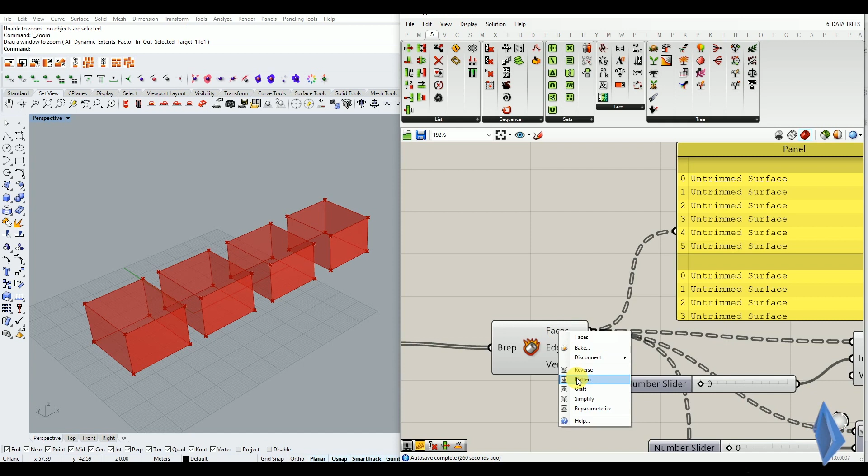Now let's try and flatten this and see what happens. If I right click on faces and click on flatten, take a look at how the data structure has changed. Now I only have one list, it says 0, no extra zeros, only one list, and all of my surfaces are inside one list. So I have 0 to 23. I have 4 boxes, 6 surfaces inside each box. 6 multiplied by 4 is 24. That's why you have 0 to 23.

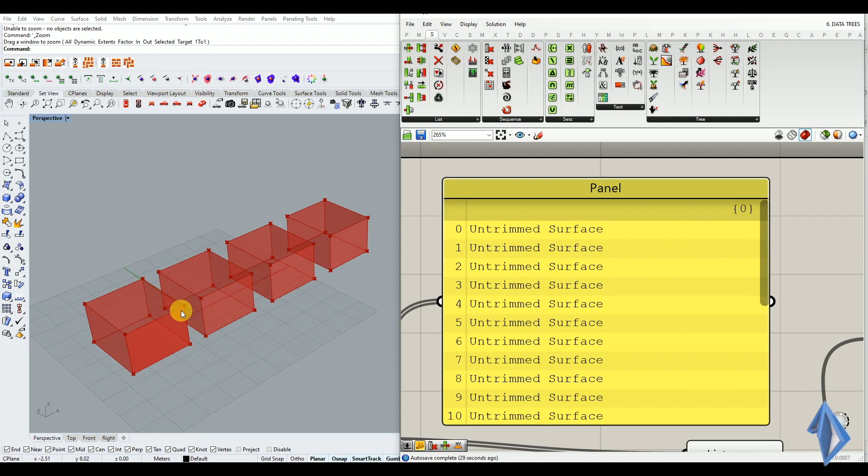So initially you have 24 surfaces, 6 surfaces inside each box, and you have 4 boxes. That's how the data has been structured. But as you can see, there are no multiple lists. There's only one single list, and all of the surfaces are inside that one list. And as you can also see, the wire turns straight. Now let's remove the flatten option. Just right click and click on flatten again, and it will go away. And now see that the data is again grafted naturally.

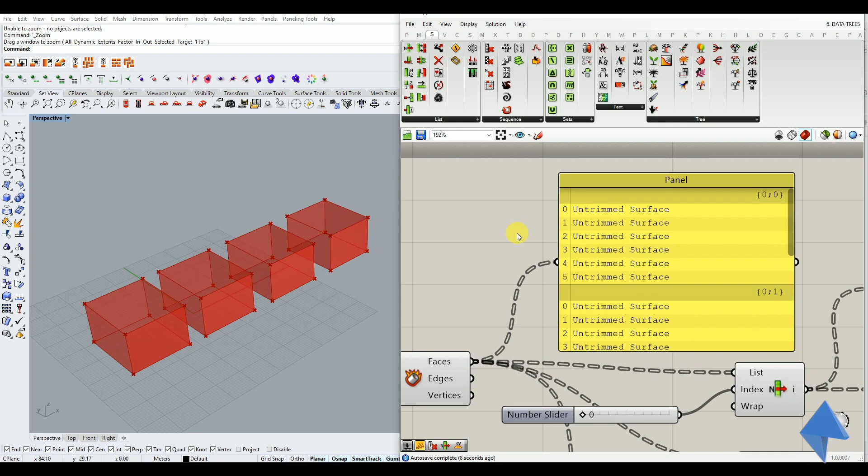So because the data structure is like this, when data is grafted and you are using list item, you are giving it the index 0. You are giving it this particular list, the same list that you can see over here. I'm inputting that list inside list. When 0 is going inside index, that means I'm selecting the 0th index of every list that I have in this particular panel, which means I'm selecting 0 over here, 0 over here, 0 over here, and also 0 over here. So that's why I'm selecting 4 surfaces at a time.

So if I click on this particular component, you see it's selecting 4 surfaces at a time. If I change it to 1, it's still selecting 4 surfaces at a time, which means it's selecting 1 from here, 1 from here, 1 from here and 1 from here. So that's how grafting works.

Grafting lets you select multiple data structures, multiple data objects in one single go, which makes Grasshopper a unique plugin, a unique visual scripting software, which allows you to work faster using the speed of computation. So this exactly is what computational algorithmic thinking, algorithmic architecture, algorithmic modeling is all about. You can use multiple data structures to select one single object or entity, and you can select multiple items inside that entity and manipulate it accordingly.

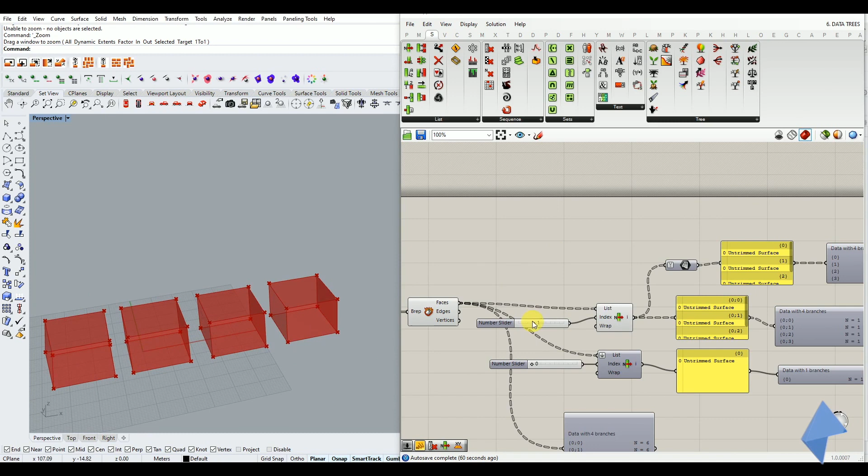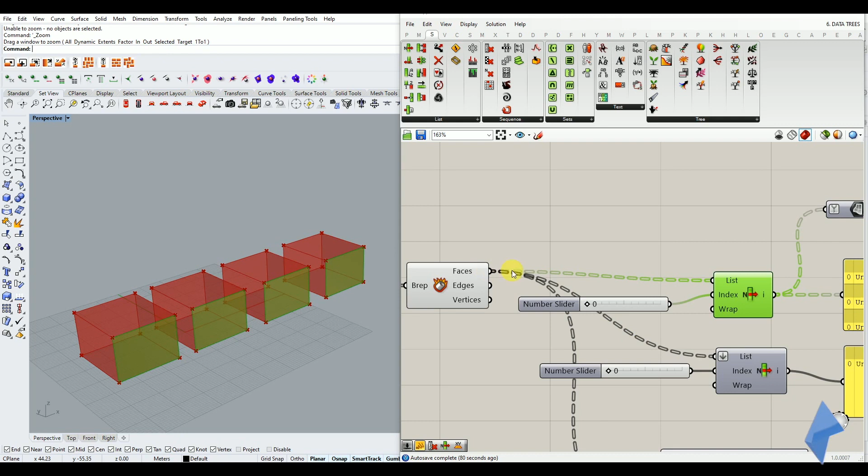So now I'll just go ahead and delete this panel, and I'll put this back to 0. I'll also turn this thing off. As you can see, I'm just able to select the front faces. These are the whole boxes, and I am able to select only the front faces using the grafted data tree structure. Now what happens if I flatten it? I have taken the same input, but this time inside my list item I have flattened it. I have right clicked on list and clicked on flatten.

If I turn it on, take a look at what happens. Over here I am able to select only one face, and when I change it to 1, it's selecting only one face, and then 2, and then 3, 4, 5, 6, 7, 8. It's selecting one face at a time.

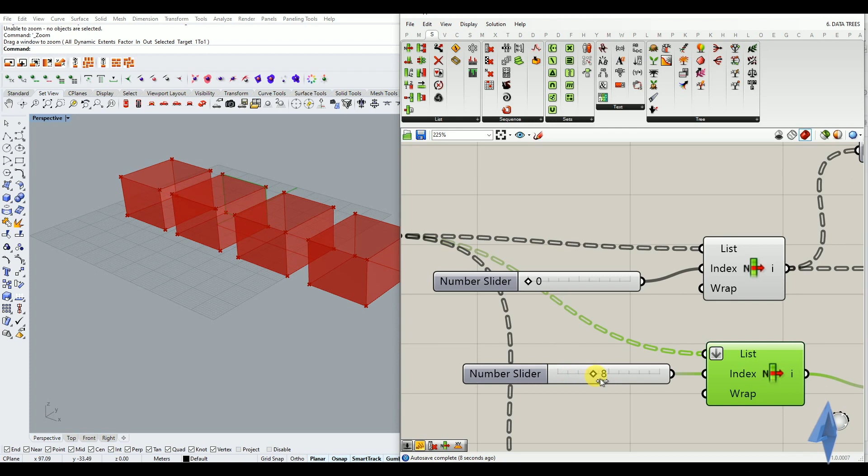So what has happened over here is, if I double click and type panel, bring in the panel component, attach it to this list over here, or I can just double click and type surface, bring in a surface component, and I can also flatten this so that I can attach it and see the data structure. You see, all of the data is flattened. So now if I'm selecting 12, that means I'm only selecting the 12th surface.

Since I have only one list, I can only select one surface at a time. That's exactly what has happened. So I'll just delete both of these. So that's grafting, and this is flattening. So if you flatten something, you can only select one at a time. If you graft something, you can select multiple data structures or multiple objects at one go.

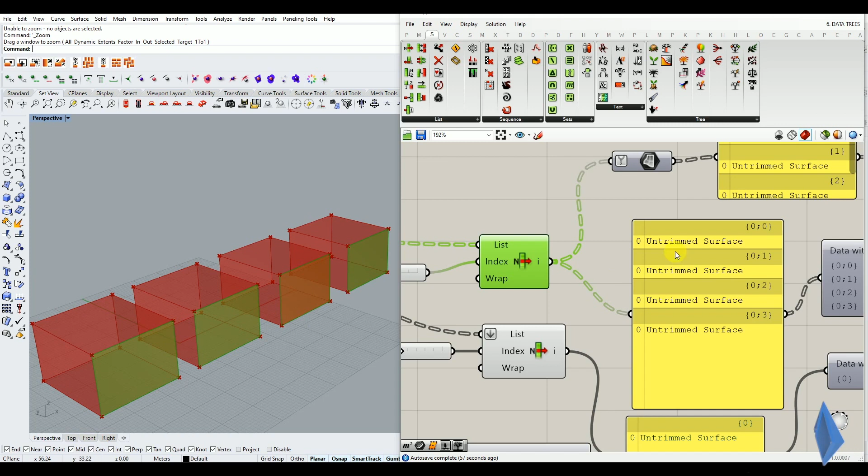As you can see, this is how the grafted data structure now looks, which means that every single surface has a list of its own. So you see, this turns into one list, this one turns into another list, this one turns into another list, and this turns into another list. So every surface now has a list of its own. That's what the list item output is giving me. But in this case, I am only able to select one surface, so it has only one single list.

Now let's go ahead and take a look at this particular component, which I have just brought in, a surface component, and I have simplified it. Now we have seen grafting, we have seen flattening. Grafting converts one single list into multiple lists. Flattening converts multiple lists into one single list with all the data. Now what does simplify do?

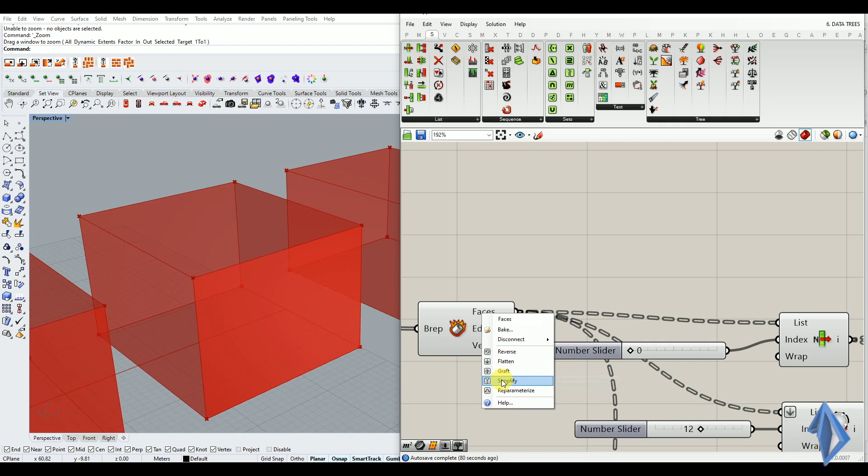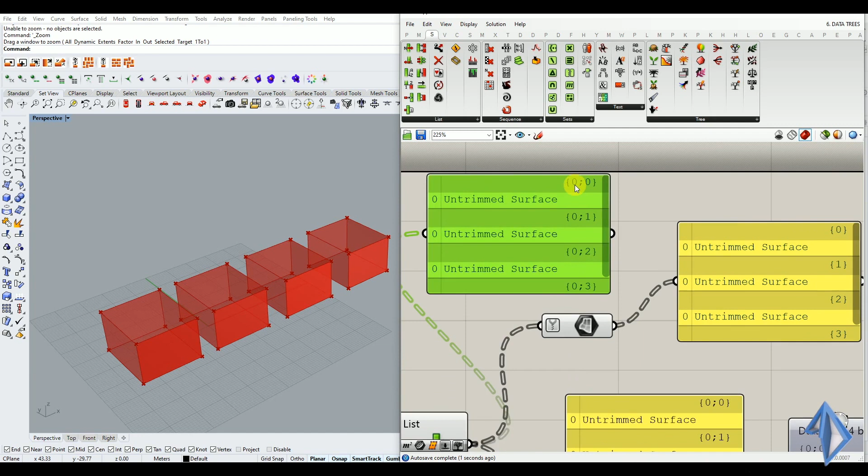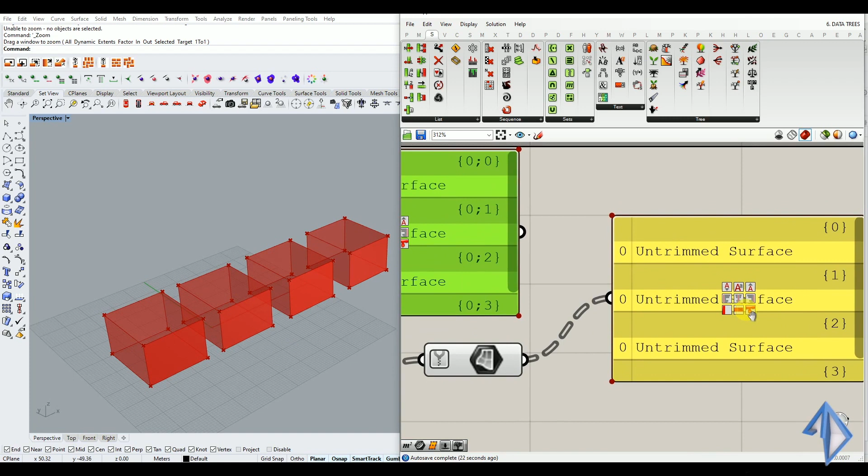If you simplify a data structure, this particular component, the surface component, actually has these four surfaces. Now I have right clicked and simplified this. What this does is, you see, initially if I use a panel component, I had these zeros before each surface. When I simplify it, the zeros are gone. So simplification essentially removes all these extra zeros and will help you to work better and understand better the data tree structure of any object or of any script. So if you simplify something, the extra zeros are basically gone.

So I'll just delete this particular surface, I'll just delete this panel, and now let's take a look at this component. If you want to understand data tree much better, instead of attaching panels to everything and looking at how the data is structured, you can also attach this component, which is known as param viewer. Param viewer, you can find it under parameters, under utility, as it is shown on the screen right now with red arrows and a red circle.

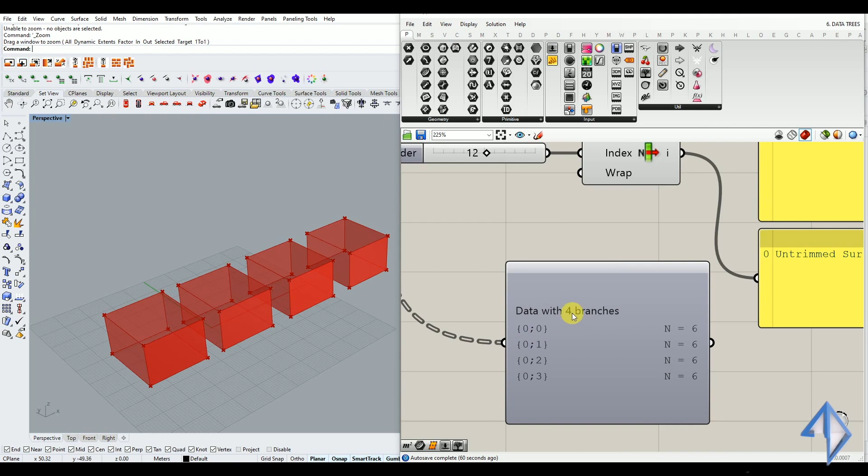This will tell you how many branches or how many lists your data structure has. Branches are essentially lists. So as you can see, you have four lists. Four branches means four lists of 0, 1, 2, 3. Each list contains 6 items. N refers to the number of items in a list. So every box has been deconstructed or exploded into 6 faces, and every box is counted as a list. So you have 0, 1, 2, 3, you have 4 of these lists, and inside each list you have 6 faces, because every cuboid has 6 faces.

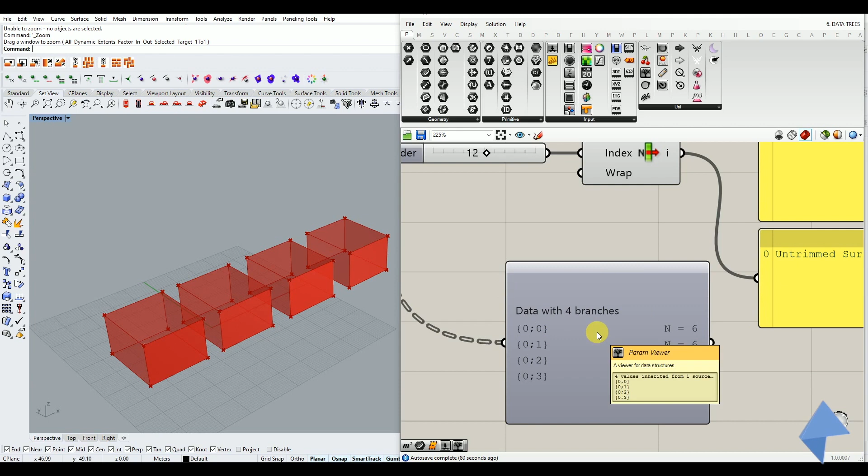You can just double click on this and turn it into a data tree structure like this. You can essentially view how the tree is structured. So 0;0 has one list, 0;1 has another one, 0;2 has another one, and 0;3 has another one. This is how the branching is, this is how the structure is organized. But if you take a look at the flattened structure, you have data with one branch, you only have one single list and you have one item. So if I double click on this, you see it only has one single item.

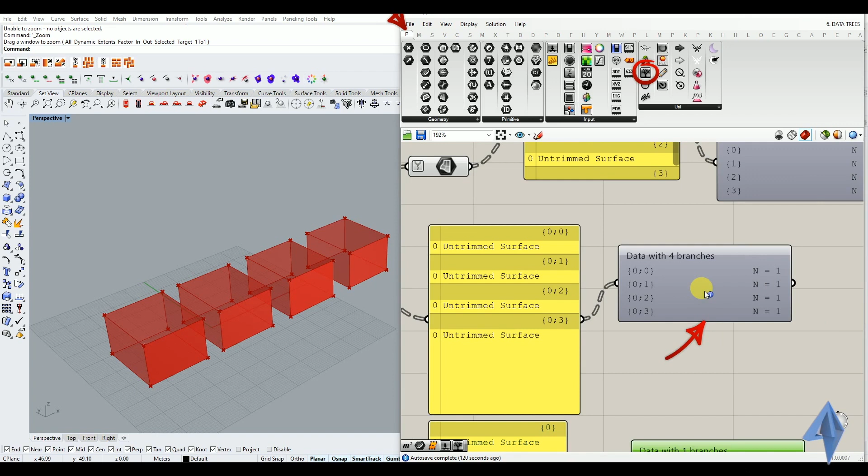So this is basically a pictorial representation of data tree. You can bring in a param viewer, you can see where the param viewer is located once again, and you can just double click on the param viewer and see the tree structure of how everything is organized.

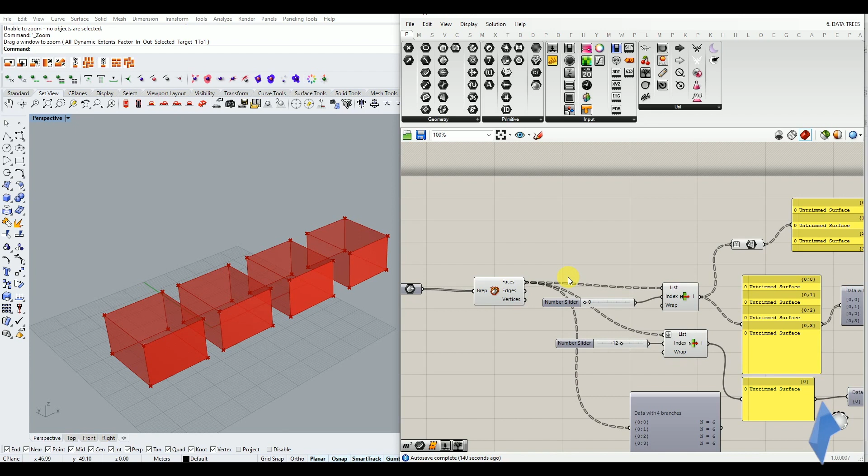So that is a very basic explanation of data tree. We have understood graft, reverse, flatten and simplify. These 4 things are the major things of data trees. This was a very basic explanation of data trees. If you know this much as a beginner in Grasshopper, you can really do a lot using data trees. You can manipulate how data is exchanged, which means you can manipulate geometry accordingly. So this is it for this particular topic.

In the next chapter, we'll take a look at some awesome concepts like Voronoi, Metaball, and Box Morph.